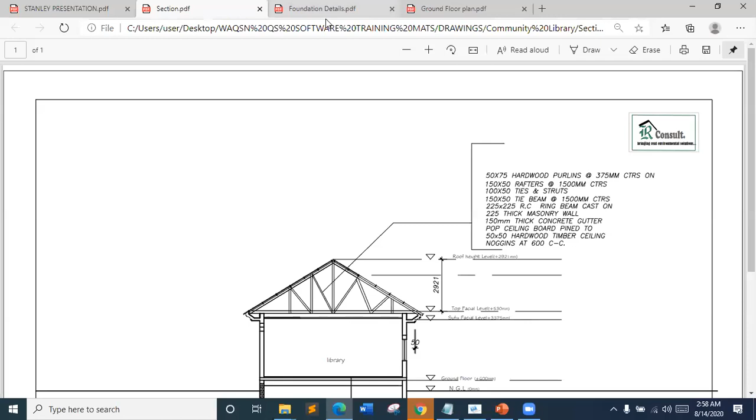So this is the floor plan for today for the project, community library. And we also have here the section, and we have the foundation plan here, which gives you details of the foundation.

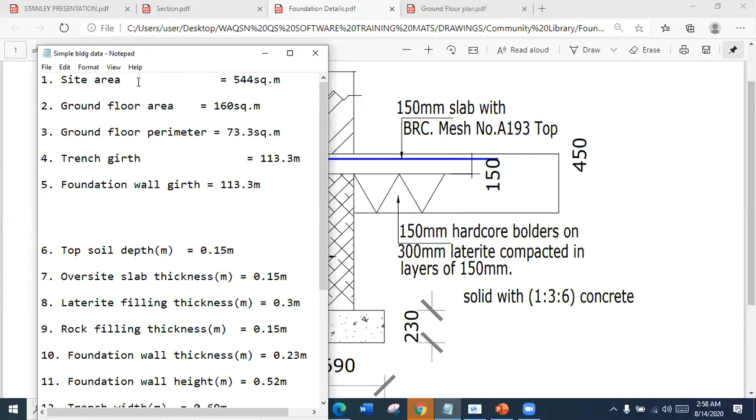So the data that we need to extract from this drawing, if you want to use the software, these are the required data. Like I said earlier on, the group A data, which are site area, ground floor area, trench girth, ground floor perimeter, and the foundation wall girth.

Because of time, I've already done this. So the site area for the project we are working on is 544 square meter. The ground floor area is 160 square meter. The ground floor perimeter is 73.3 meters, it's supposed to be meter, it's a mix-up. Then the trench girth is 113.3 meters.

Foundation wall girth is also 113.3 meters. Then the group B data, like I said earlier on, does not need measurements. There are data that you can read directly from the drawing or specifications, like the topsoil depth, the oversite slab thickness, the laterite filling, rock filling thickness, foundation wall thickness, and others. So these have been done, and I sent it to the group this morning.

So the next step is to input this data now in the software and see how it will generate a material schedule. Also, it will generate the BOQ for us. So I'll switch to the software now.

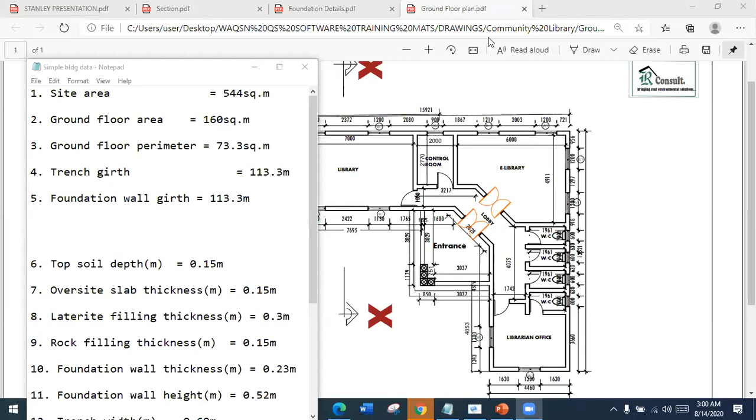So the category we'll be working with today is the auto takeoff and BOQ category, because we are working on taking off for community library project substructure. So to use that, you double click on auto takeoff and BOQ, and this opens. We have a lot of items here, but what we are interested in now is the third item on the list, which is building takeoff. So you click to open the form.

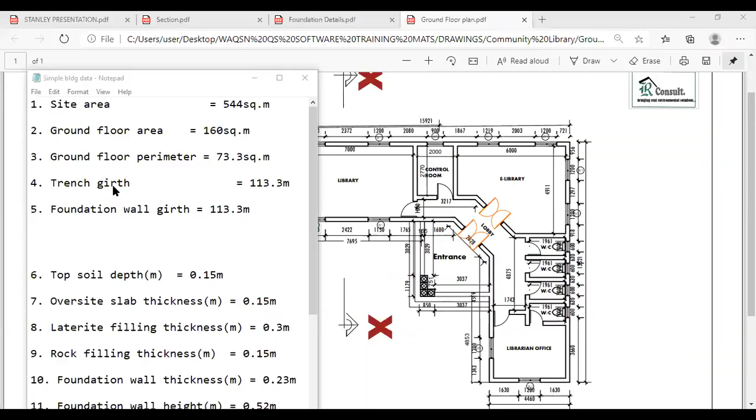The difference between this third item and others is it captures a lot of items under building. For example, you have site and trench details, you have column base details, you have ground beam details. From substructure to superstructure, they are all captured under this third item. The other ones here are for when you're interested in only column base, for example, you use the column base form here. But if you are interested in trench, column base, and others, you use this third item, which is building takeoff and BOQ.

So to display both forms now, I believe you already have the data that I extracted, because I gave an instruction on the group, on the WhatsApp group, that you should write these values out so that you can follow up. But I will advise that you watch me as I'm doing it, then after I'm done, you can practice later. So just pay attention so that you will understand what we are doing.

So what we want to do now is just to enter this data into the software. When we enter the data into the software, it will generate about 21 results for us. Let me quickly show you how this is done.

We need to reduce the width of this. You can reduce the width of the menu part. When you hover your cursor on this demarcating line, it will show you a sign, and you can click and drag to the right. But you don't need to do this if you have the values, if you have them written on paper, you don't need to reduce the width of the screen.

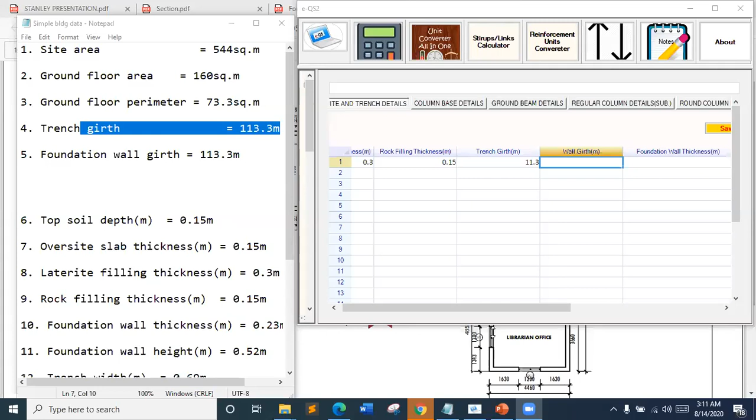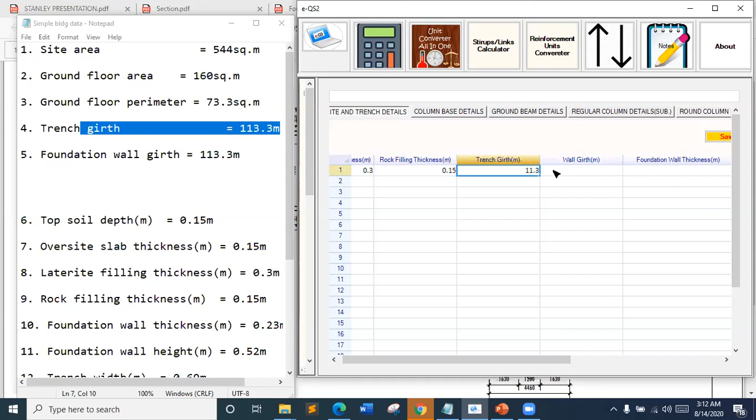So I stopped at trench girth. I was explaining that in a project that does not have a column base, the trench girth and wall girth are the same. If there will be a difference, it will be minimal or negligible. So here we have the same value for foundation wall girth and trench girth. We put the same value here, 113.3 meters.

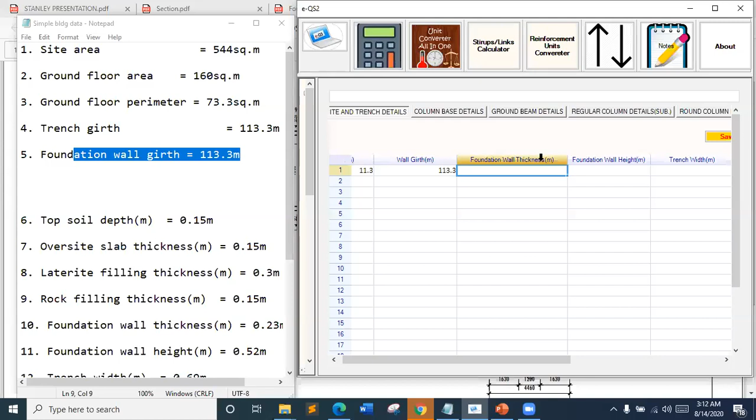Then the next is foundation wall thickness. This also falls under group B data, which is given here as 0.23 meters.

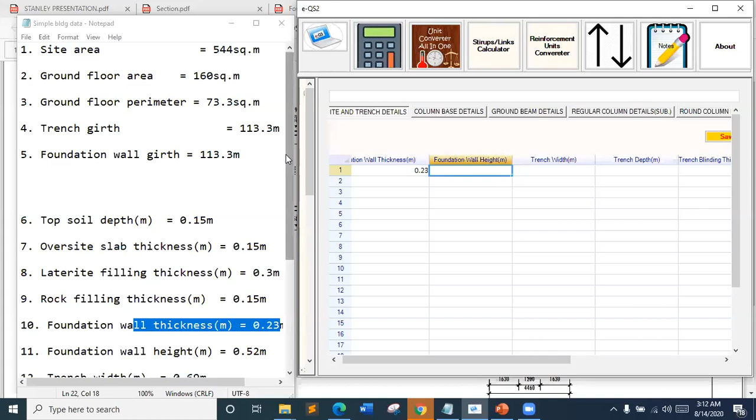Then the next is foundation wall height. This is from the foundation detail, and we have that data here as 0.52 meters.

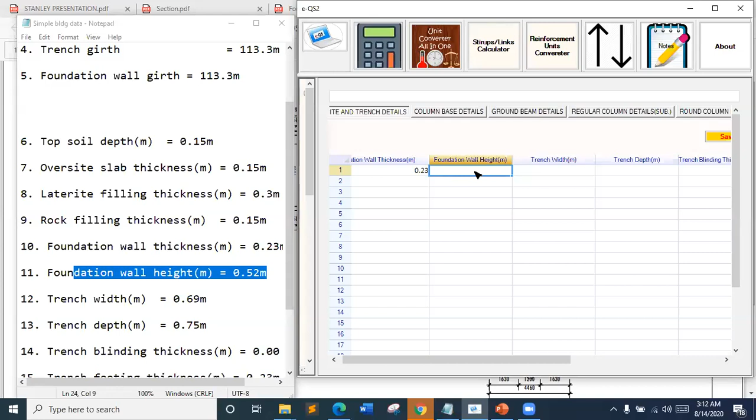Then the next is the trench width. Trench width is also group B data, which you read from the drawing, 0.69.

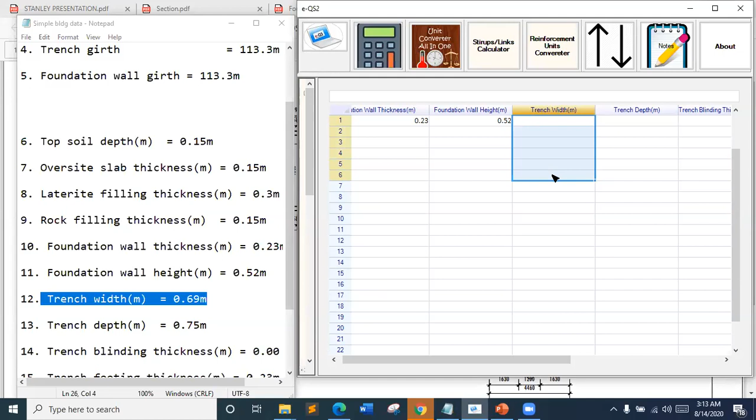Then we have trench excavation depth. Trench excavation depth is also given here as 0.75.

Then the next is blinding thickness. For this project, it's just a community library project. It does not have column bases, so there is no blinding there. We only have trench footing. So the blinding, we put 0 there.

The next is the trench footing. Trench footing is also a group B data. You read from the drawing is 0.23 meters.

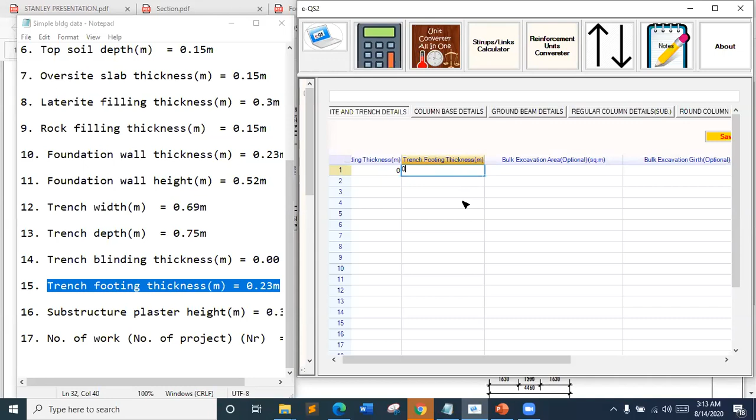Then the next is bulk excavation area. You see it's captioned there as optional. You need this for where you have a bulk excavation, because then you don't need a trench girth and all that. So for this project, we are not doing bulk excavation here. So you put 0 in this bulk excavation area, which is captioned optional, and also the bulk excavation girth, you also put 0 at that point.

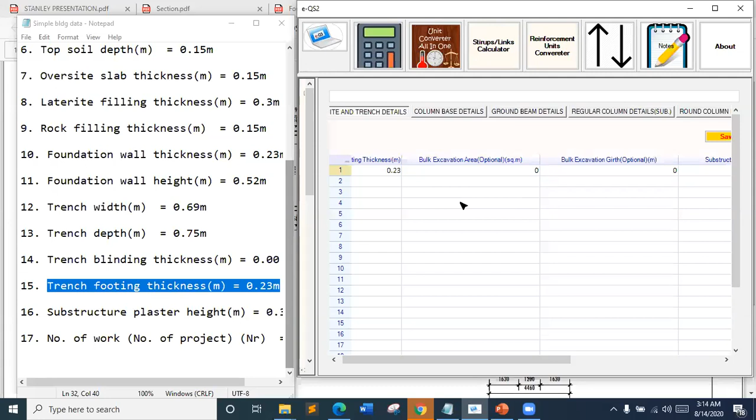Then the next is the substructure plaster height. We also do plastering in substructure. So the thickness here, the substructure plaster height here, is 0.3 meters.

Then the last is number of work. Number of work also means number of projects. So it's just a single project. Whenever you see number of work, it means number of projects. You just put 1 if it is for a single project.

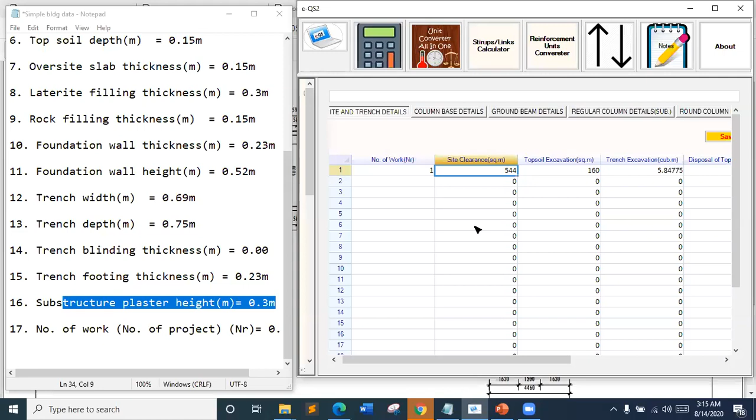Then when you put 1, you click outside, or you use your forward key or the right key on your navigation bar on your keyboard. Then it gives you the results. Here we have 21 results or quantities generated from the values that we have inputted.

Here we have a result for site clearance, which is 544. Then next we have result for topsoil excavation area, which is 160 square meter. The next we have result for trench excavation volume, which is 5.84 cubic meter.

We have a result for disposal of topsoil. We have a result for disposal of surplus material. Then we have a result for leveling and compacting, which is in square meter.

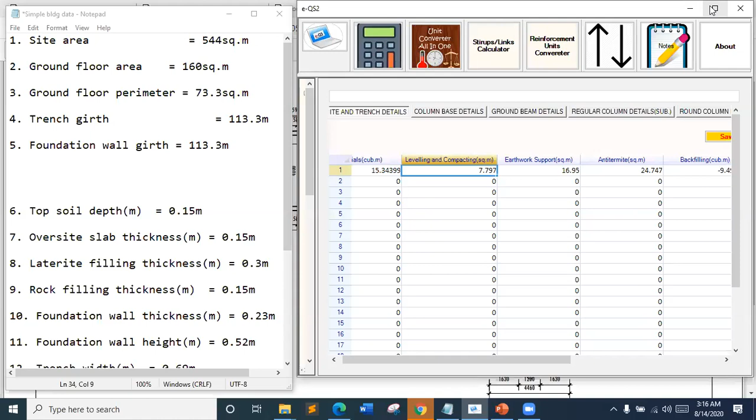If you want to check the units, some columns may not show the unit, so you can expand. Since I'm not using this again, let me maximize the page. As I was saying, you can adjust the width of any of these by hovering your cursor, just like you do in Excel. You just drag and it shows you the unit there. We have value for leveling and compacting.

The next is for earthwork support, which is 16.95 square meters. We have for anti-termite, which is 24.74 square meters. Then we have for backfilling. We have for laterite filling, rock filling.

We have for trench blinding, showing 0 because we did not provide a thickness for trench blinding. If you go back, you note that the trench blinding thickness, yes, here the trench blinding thickness, we put 0 there.

So the next we have a result for oversite concrete thickness, oversite concrete volume, which is 24 cubic meter, trench footing volume, 17.9 cubic meter, form up to edges of ground floor slab, 73.3 meters, then mesh reinforcement in ground floor slab, 160 square meters.

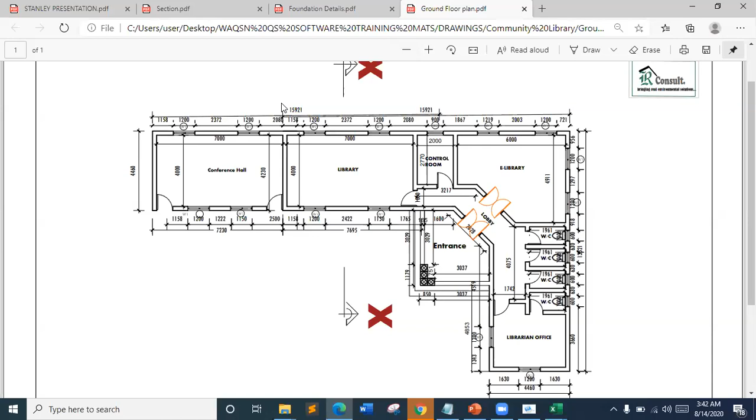Because if you check our learning outcome, it also includes understanding how the software automates taking off processes. All the results here, the results from the BOQ, they come up from automation. So now you need to understand how the software does this, and that's the next thing we are going to look at.

Remember, these are the raw data which we inputted into the software, the group A data and group B data. Those data now generated this result, so we have values generated in the output section and BOQ.

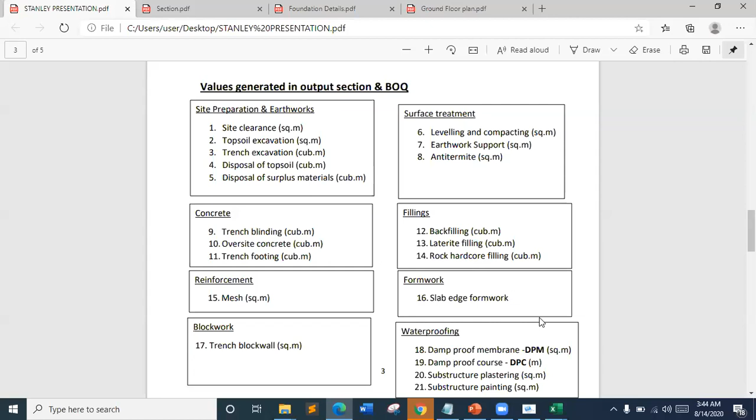I know that if you were to be doing all this manually using this data, it's not difficult, but it's just the time that it will take, and this one is faster. So now you need to understand how the software generates all these results by working with this data that we provided, the group A and group B data. That's the next thing we look at, how the software automates the taking off processes.

For site preparation and earthworks, the first is site clearance. How does the software automate site clearance to give you site clearance area? It just takes the site area value which the user has provided. Then for topsoil excavation, the software just uses the site area. You need to understand how the software automates these processes so that you can decide whether you have confidence in what you purchase, and you can cross-check this with the values generated in the BOQ.